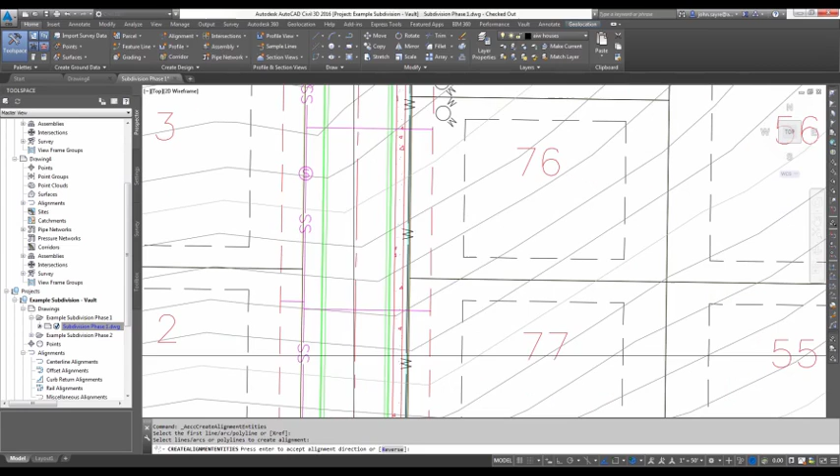Okay, so I'm going to check out my phase one drawing, and I'm going to create an alignment for a road, and I'm just going to call it Road A. So I'll go up and select alignment from objects, and let's call it Road A phase one. That way we can tell what's going on here. So I'm going to leave everything else pretty much default and hit OK.

Now, again, this is phase one. So I'm going to hit save, and I'm going to go ahead and check this into the vault. So I'll check it in.

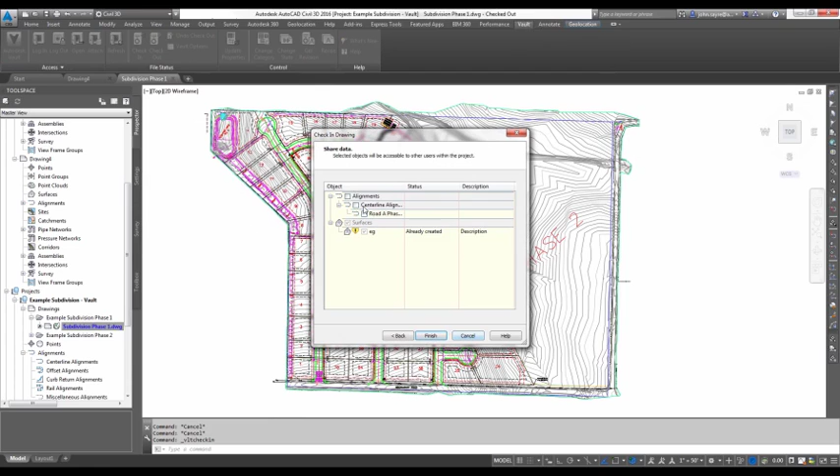So once it's checked in, then I'll need to go ahead and open up the Vault Explorer. I'm going to create a folder underneath my centerline alignments that's called phase one and move that alignment into it. We didn't have this ability before, but again, this is one of the new features in Vault Professional 2016.

So I'm going to grab my example subdivision project, and I'll drill down to where I can see my alignments, and I'm going to select centerline alignments. You can see that Road A phase one alignment. So I'm simply going to right click and hit new folder, and I'm going to go ahead and call this phase one. You can name this whatever you would like.

Call it phase one. Let's go ahead and create a phase two. That way we already have it. And I'm going to grab out of that centerline alignments folder, my phase one alignment that I built for Road A and drop it into phase one.

All right, so now if I go back to centerline alignments, all I see here in the Vault Explorer is just this phase one and phase two folder. So I'm going to go ahead and go back over here to Civil 3D, and you can see that that's not really how it's set up and shown here under projects for the Vault in the Prospector tab.

So what I need to do is refresh my project. So if I grab my project, select my project, and go up and hit refresh, then now you can see under centerline alignments, I have a phase one folder. Now, I don't have a phase two folder because until I put something in the folder, it won't recognize it as being there. So you can see I've got my alignment.

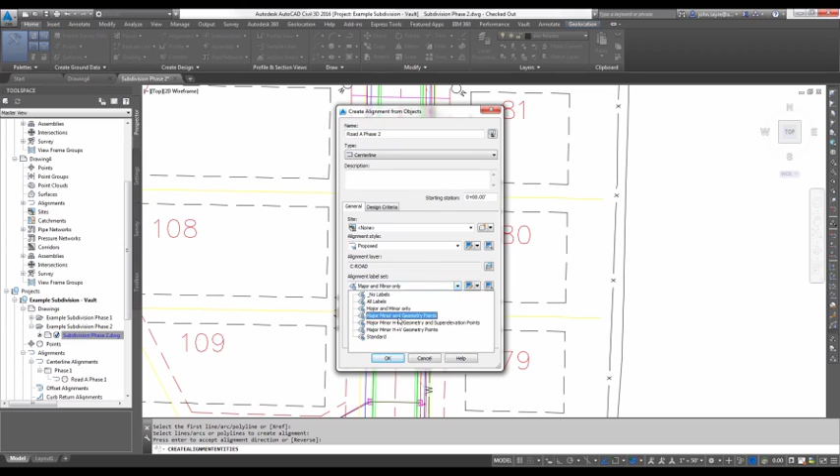Again, we'll hold most of the defaults here, and it generates my alignment. I'll go ahead and check it into the vault. Hit next and go ahead and select my alignment. Notice that it is the phase two alignment. It will be added, and it adds it to my project.

So you can see right now under centerline alignments, I've got a phase one folder with my phase one alignment, and then I've just got a phase two alignment, but it's not in a folder or separated out. So let's jump back over to our Vault Explorer, and I'm going to go up and refresh, and you'll see that it populates here underneath centerline alignments.

I'll select it, drop it into phase two, and now it's separated out into my phase folders for my alignments. I'm going to jump back to Civil 3D, and we simply select our project, hit our refresh button, and now our directory tree shows up as it should. We can see phase one, Road A phase one, phase two, Road A phase two.

Now this can be done for not only alignments, but it can be done for surfaces, pipe networks, pressure networks, so on and so forth—whatever project data you can add into the vault from Civil 3D. It's a great way to keep things separated per project or per phase. It just gives you a better way of separating your project data out.

Now, something else that's a new feature inside of Autodesk Vault Professional 2016 and the interaction between it and Civil 3D is the fact that you can now create references to objects from any project. So I actually have a phase 2 here, so I'm going to leave my current project set to my example subdivision vault. I'm going to open, or actually check out, that phase 2 drawing again.

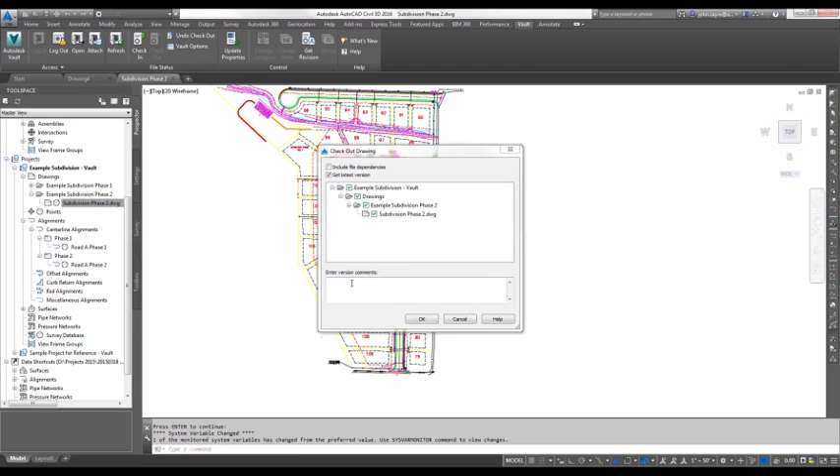You'll see that I don't have any topo or anything shown on my phase 2 because they haven't shot it yet, or they may not be going back out to shoot it because we might have gotten it in phase 1. So I have a totally separate project that's inside of my vault here. It's called Sample Project for Reference.

So this project itself houses my surface. I can see it right here. If I drill down under projects, I can drill down in the vault and see I've got my surface.

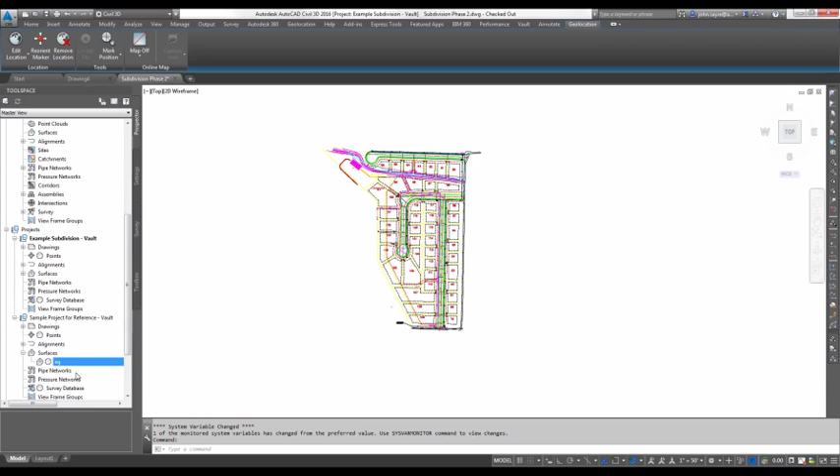Now I can see here that my active project is highlighted. Okay, so my example subdivision, where I checked this file out from, that is the project that's active. This project I'm going to pull the surface from is not active, so I can simply select the surface from my other project, or the phase 1 project if you would, and right click and select create reference.

I'll just leave it EG, and I'll give it a different style, 1 foot, 5 foot background, hit OK, and I have just referenced this overall surface from another Vault project.

Now again, you're able to do this with alignments, profiles, pressure networks, anything that you can check into the Vault from Civil 3D. You can not only separate things out by folder to organize better, but you can actually readily access any Vault project data from any other project inside of the Vault.